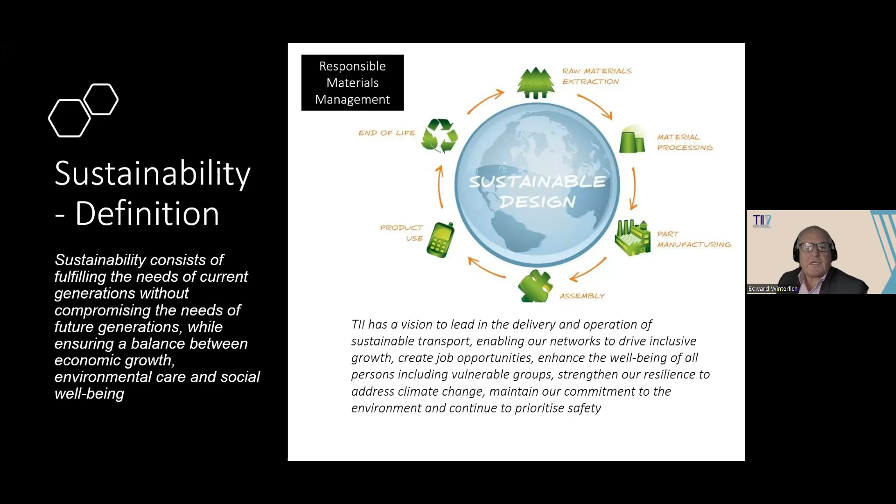So really our vision, as stated in the previous slide, is backed up by a sustainability statement. When you look at the statement, it covers four headings: corporate leadership, stakeholder and public engagement, evaluation and continual improvement, and strategic management.

It's within this strategic management area that I'd like to focus, taking a very narrow focus in terms of standards, pavement and minor schemes. If you look at what's actually printed in our statement under strategic management, you can highlight very quickly in those paragraphs where the importance is providing guidance and standards for industry.

And that's what TII do. It's setting the scene and providing the tools so that industry can respond, maximize and optimize their designs within the IAPDM, and also maximize the amount of materials that can be recycled and reused in a sustainable way, and be innovative in producing new materials.

That runs right across, and it's really down to them to achieve efficiency gains in the operation and running of network systems. So it's taking all of that, not just one thing. It starts with effective asset management, and runs into proper and good quality production of materials.

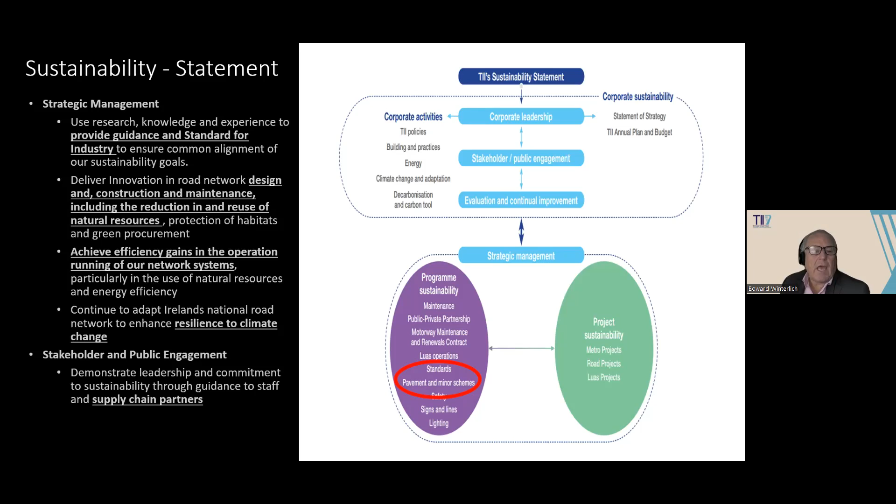So again, when you look at the vision and the statement, that's backed up by our sustainability implementation plan, which covers 6 principles.

Within the context of this presentation, I'm going to focus on principle 4 and 5, which is to deliver end-to-end improvements and this transition to net zero. It's delivering enhanced whole life cycle costing and value through the impact and influence on stakeholders and partners and suppliers.

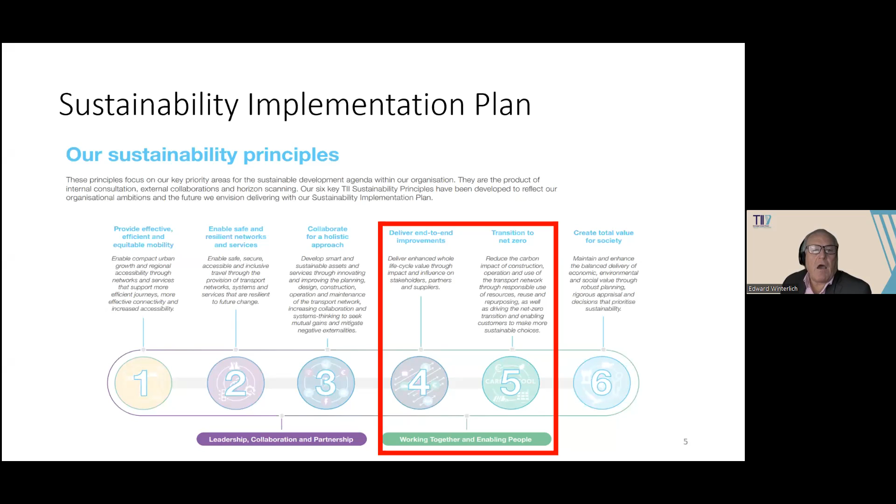The transition to net zero - well, pretty much 5% of the embodied carbon in our network is really down to materials only. The rest is to do with traffic volumes and emissions from transport. But it's taking that small piece and doing what we can, by producing proper materials and implementing and managing them in a proper asset management way, that we can work towards reducing the emissions of transport overall. So that's where I really want to focus this evening.

Principle 4 really talks about delivering enhanced whole life cycle value through impact and influence on stakeholders, partners, and suppliers by using fewer resources, using procurement to build total value, and providing guidance to suppliers via standards, working with suppliers and stakeholders to find solutions, and influencing the use of sustainable materials and better design.

Pretty much all of that is what we're currently doing today. The only bit where there is still significant work to do is in the second point, in terms of procurement and bringing all these systems together in some kind of sustainable procurement manner. Again, it's responsible materials management right through from the design of the pavement structure, to incorporating the various products in that structure, and then procuring them in a sustainable way.

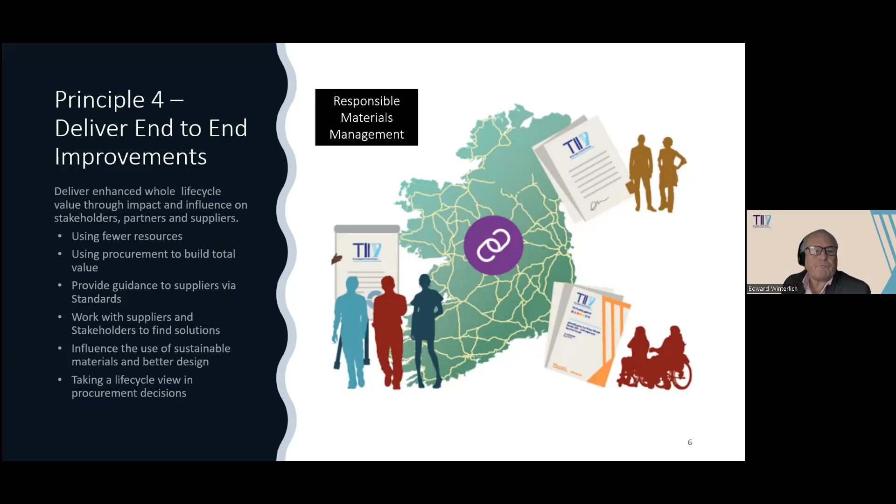The principles of transition to net zero, again, by decarbonizing our own activities. So within that 5%, it's doing what we can to reduce the carbon within the production of these materials, and re-engineering our systems to optimize material use. That's the definition of our Irish Analytical Pavement Design Method, contained within our standard DN PAV 03021. It's trying to reduce the amount of material we use, and through better maintenance, increase the lifetime of our assets. So it's about optimizing our design and maximizing our recycling capacity within the industry.

So how are we managing our pavement sustainability today from a pavement asset management perspective? On a daily basis, we're looking at this in TII, and our policy is set out there: assets will be managed in a sustainable manner through the development, implementation, and maintenance of an asset management approach that is risk-based and data-driven. And that's the entire nub of it - it's risk-based and it's data-driven.

It's evidence-based, so that we can respond to issues on the network in a sustainable way. Good asset management requires coordinated and optimized planning throughout its life cycle, from development, creation, maintenance, and ultimately disposal - that's contained within that graphic there. So it's following that right from the very start in designing your asset management system.

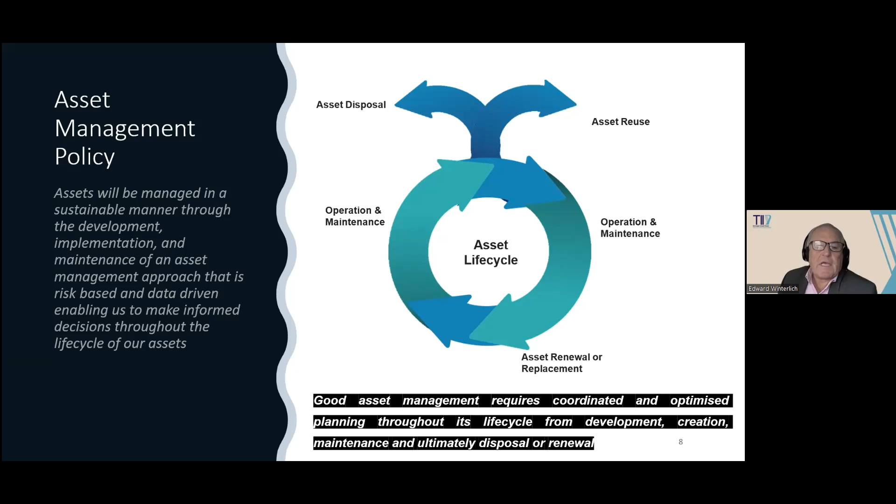Our system is designed in such a way that the key was setting it up to define the network in terms of its sub-networks. So we treat our motorways differently than we treat our legacy pavements at subnet 4 and our low volume, really low volume national secondary coastal routes, for instance.

That's defined - I'm not going to read all of that, but within the presentation it gives you what a motorway and a dual carriageway is, which is fairly obvious. In terms of an engineered pavement, these are the national primary routes that may have been previously realigned, and if they've been realigned, we assume they'd have some kind of engineered pavement. Urban networks are fairly obvious, and legacy network 3 and 4 are the sub-networks and the low volume roads. So you can't treat a motorway in the same way as you would treat subnet 4.

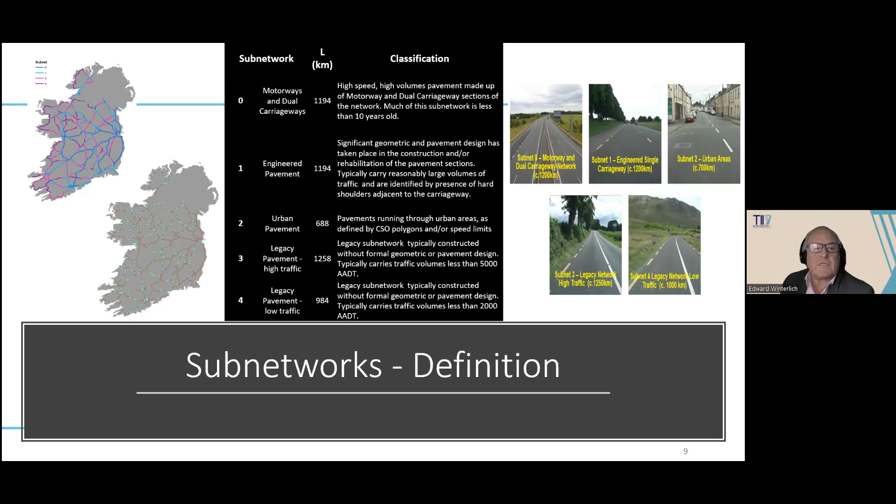That was key to our asset management policy, and in further building the resilience of our network to climate change. How is that done? Well, very simple - we have different levels of expectation from each subnetwork.

It's built around the criteria of IRI, rut depth, and longitudinal profile variance at 3 meters. So within subnet 0, our motorway network, when it's operating in the very good category, we expect an IRI of less than 1.5, whereas down at subnet 4, we're happy enough if it's operating less than 3. So that gives you an example right across the board in terms of how we expect our network to perform.

By analyzing the network in this way, we can have a very targeted approach to what treatment is required, and we can sustainably build a program of works - the current program is from 2022 to 2024, over a 3-year period. We can then rerun the system on an annual basis, refine that program if necessary, and pick up any areas that may have failed or deteriorated quicker than we would have expected.

And within the system, we have treatment costs and benefits and different outcomes from different maintenance treatments. That's hugely important. We're getting the whole sustainable approach to the management of our network in the first instance, before we even get near developing the various designs or interventions we possibly need to do.

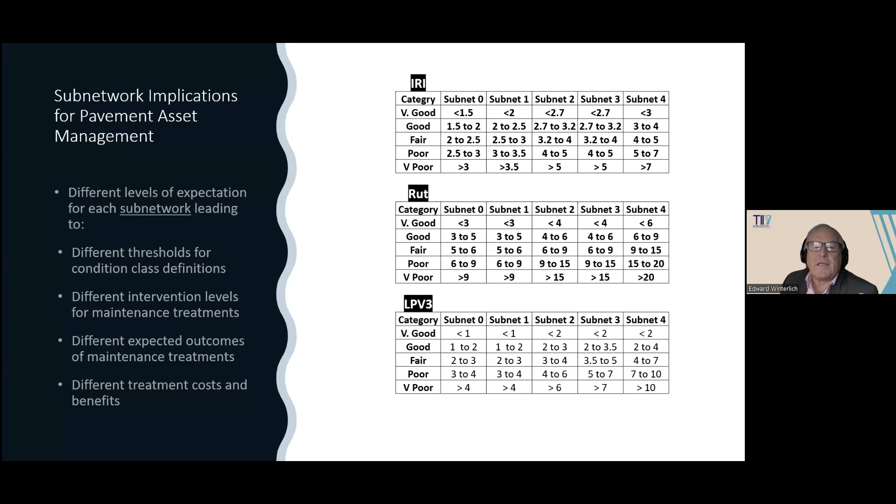And then within the system, we have interventions defined as being surface replacement, an overlay, or strengthening or reconstruction. So as I say, that's hugely important in setting the scene and setting our response to managing the network in a proper and sustainable way.

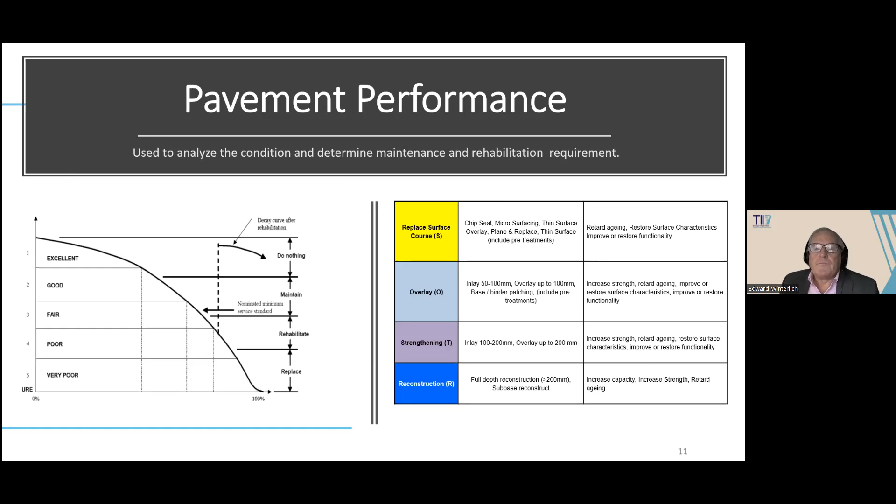The next part of developing this sustainable response to managing the network was to look at our materials. You'll note our Series 900 was published in 2022, and that was a direct move away from the old British standard recipe approach, where all materials were treated the same, to a more performance-related basis, whereby we set out that we wanted materials to operate in a certain area in terms of voids, proportional rut depth, and in terms of water sensitivity and stiffness. So that was a move towards European methodologies as opposed to British standard.

This was setting the scene essentially to bring in a sustainable design method and treat materials differently. Equally, Series 800 has been published recently, I think maybe July or August, and again that was a move away from the whole British standard methodology. Now Clause 804 is known as Unbound Granular Material A, and in terms of its performance, it's a move away from a recipe-type specification to a more performance-related one. Depending on the design level you pick within the IAPDM, you can figure out what your design performance is, whether it's compaction or other stiffness methodologies, stiffness modulus, and so on.

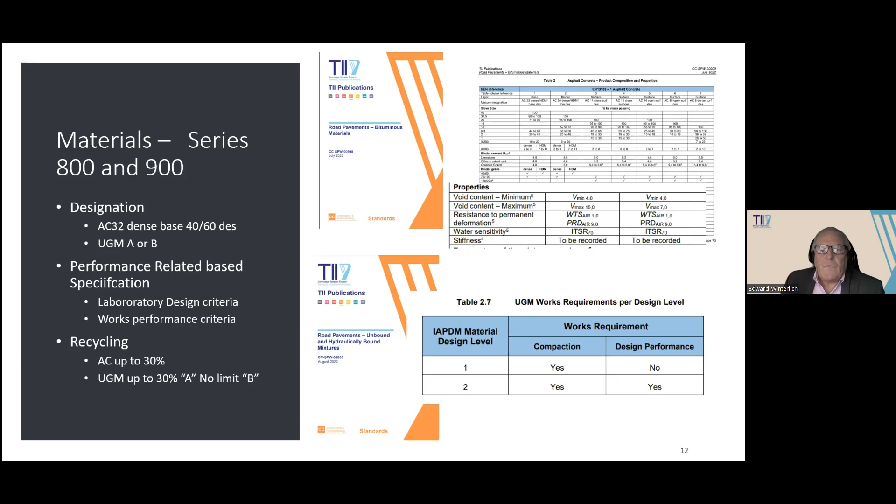So again, how are we managing our materials, our pavement design, as of today? What are people doing? They're actively engaged in sustainable design, given that we published our IAPDM last month and its associated standard. What we moved was away from a recipe approach, an empirical approach, to a mechanistic empirical design. So we're looking at our models, taking into consideration the climate, importantly the material properties - again going back to Series 900, taking into that performance-related properties - taking into consideration traffic. It all goes into this mechanistic analysis, and then outcomes to predicted performance.

This is the critical piece of design software or standard that is required, in that now we can take industry's innovation, or the various RAP contents or recycled aggregate contents that we want to use within mixes, and directly compare their performance to a standardized mix. That is a game changer in terms of sustainability.

That was published and is available, and I think I've currently got about 30 people signed up across our web portal with access to use that design approach. The other old method, HD 25/26, is now withdrawn, and this is the standardized method of design from here on out. So this is all happening on a daily basis now, which demonstrates that the bituminous industry is behaving in as sustainable a way as possible based on current standards.

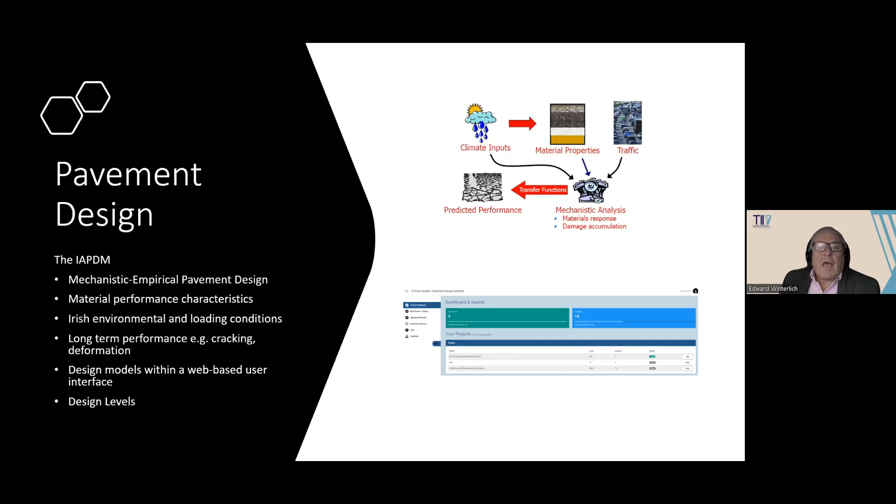Again, the other critical piece not quite delivered yet is the whole life cycle management tool that will go hand in hand with our IAPDM. What we're looking at is developing environmental product declarations, which are key to this whole environmental and sustainable piece, in that you will be able to use the IAPDM to come up with various design options - design option 1, 2, and so on. Then it's taking the EPD and life cycle analysis, initially for a product and then subsequently a project, and putting that into a life cycle management tool that's linked with our IAPDM, and then producing an optimal design.

That's the main piece of work going on currently, and we have delivered to our industry working group, in a spirit of detailed collaboration, the first draft of our product category rules, complementary product category rules in accordance with 15804, for the product stage from A1 to A3. We hope to expand that into the construction stage and then on into C and D. The very difficult part is the user stage, and that will be coming on later, it's really a matter of availability of data.

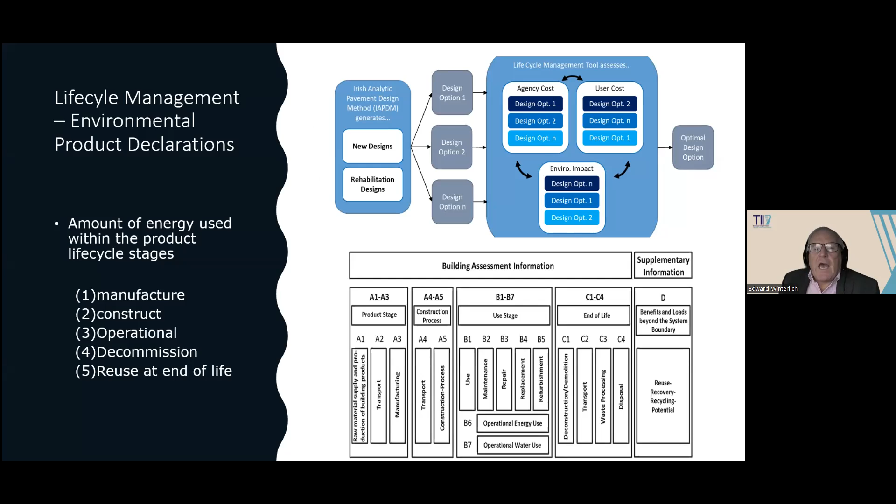So that's an ongoing piece of work, and an update is that the closing date for comments from industry was last Friday. They've been very good to respond. We'll analyze those comments and adjust the documents if necessary, or certainly clarify and explain. It would be my hope to have contained within our Series 900 a requirement for industry to produce an environmental product declaration, similar to a CE mark, as part of the product specification, and then ultimately working that through to project and into the procurement piece, which is probably a bit further down the line.

In terms of education, Engineers Ireland run a course which was developed by TII in association with our technical partners, Arup. This is the education piece - it runs from Engineers Ireland and is accredited by TU Dublin at 5 ECTS, essentially one module of a master's. At the very core of this is IAPDM and lifecycle management, and really this course is everything you wanted to know about pavements but were afraid to ask, to take a phrase from a well-known movie.

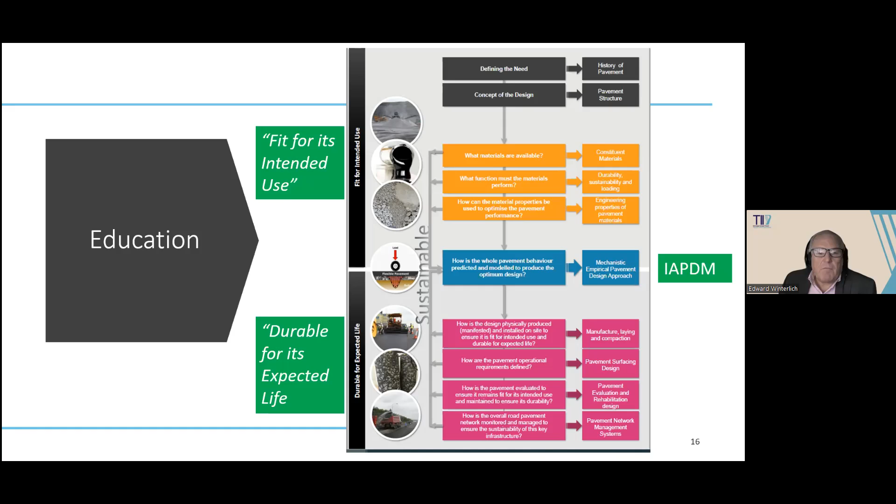Thanks very much. So my name is Alan Anderson, I'm a project engineer with Colas Ireland. Today I'm going to talk you through some of the materials we use in pavements. I'm going to talk about some of the low carbon options.

So again, I'm from Colas. For any of you that don't know, Colas is an abbreviation of cold asphalt. So that's some of the topics I'm going to talk about.

So what I'm going to do is go through some of the processes that are being used on TII on the network, and then some of the other processes and maintenance tools that can be used. I'm going to talk a little bit more about the materials, the basics, and hopefully you all get something out of it.

All of this aggregate that goes into a hot mix asphalt, in the name, has to be heated up to 180 to 190 degrees. The bitumen is at 160 degrees. So it's mixed together through the plant, depending on what type of material you're looking for - our asphalt concretes, our hot rolled asphalts, and our SMAs. They're brought to the site and laid at a higher temperature.

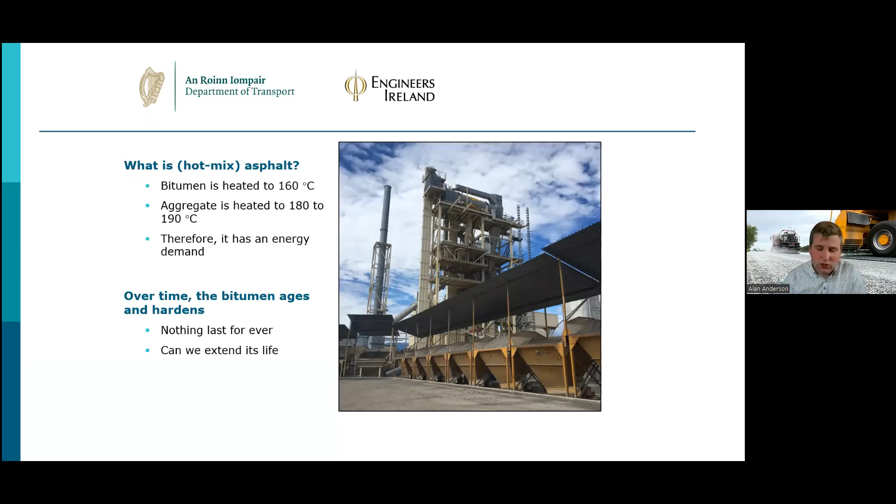So again, that's just brought to site, laid hot by a paver, and then compacted to get your required densities with rollers. Some of the alternatives work in conjunction with a hot mix. We have two options, I suppose. One is a warm mix asphalt.

So again, this is the same typical process - you're doing your hot mix asphalts and adding either a wax, foam bitumen, or a chemical surfactant to reduce the temperatures of that hot mix. As can be seen on screen, it can be reduced by up to 35 degrees for mixing and laying temperatures.

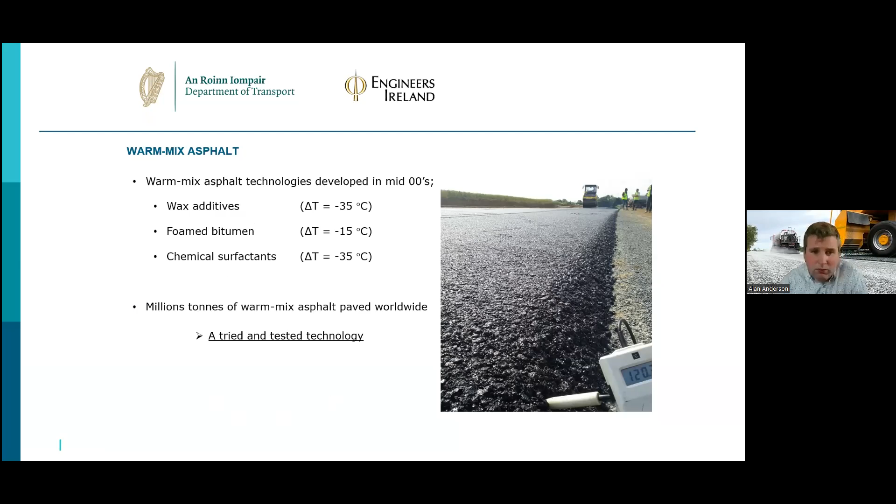Here's some information on warm mix that we've done within Colas. As I said, we can reduce it by 35 degrees. It does reduce the VOCs on site. It can reduce the mixing by 15 to 20% in fuel usage. And we can have a saving of 16 tons of CO2 equivalent, per kilometer, when compared to 22 centimeters of asphalt layer, 7 meters wide of a pavement.

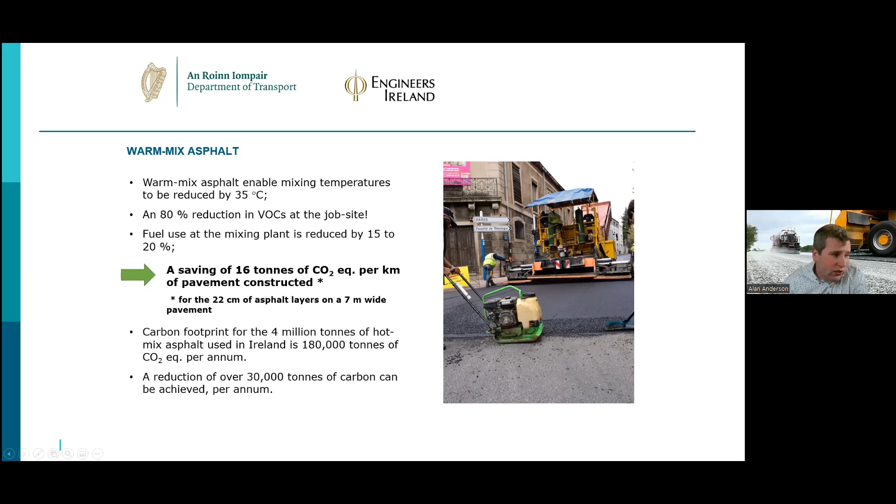So where am I getting these figures? This SEVE tool is an environmental tool designed by the European Commission. It's used in France, Hungary, Spain, Germany, and us as Colas - we have access to it. It's an environmental tool, so it gets your raw materials, your manufacturing practices, your transport, puts it into the tool, and gives you your outcomes of your environmental impact - the greenhouse gas emissions or your carbon footprint. That's a tool that's used across Europe at the minute, and for this presentation purposes, I have put in some figures.

So what that tool does is give contractors or the people doing the work an option to use an environmental comparison between different processes, some of which I'm going to talk about now. It can show you the benefits of using a particular process on a project.

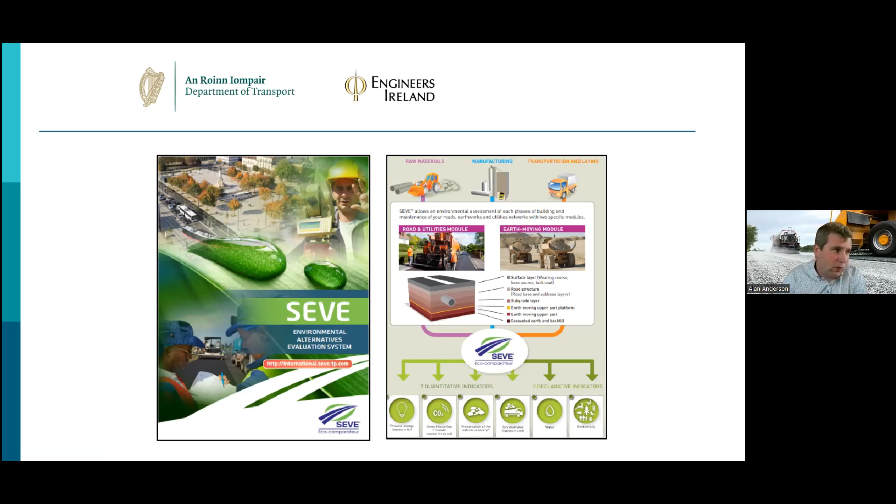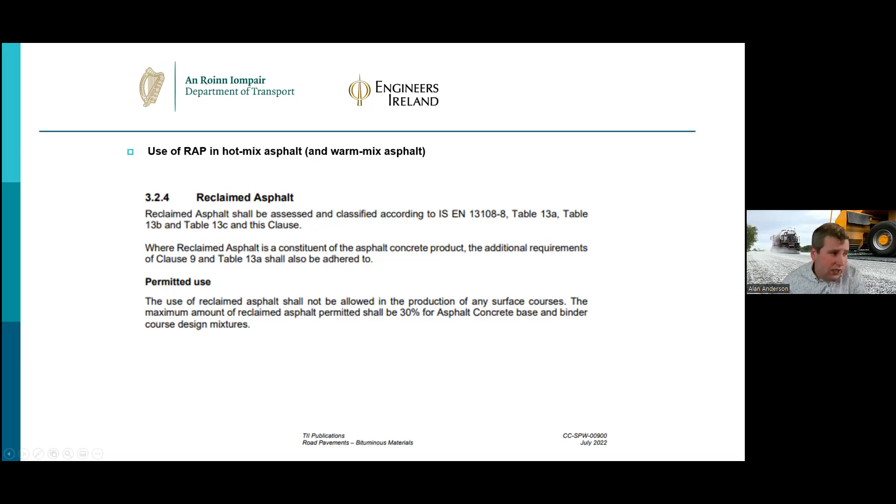The second part, when I'm talking about hot mixes, is the use of reclaimed asphalt, which Eddie showed in his slide. The most important point is the last sentence: reclaimed asphalt should not be used in surface courses, but you can use up to 30% reclaimed asphalt in your hot mixes for base and binder courses. Just something to stick with there.

So what are we talking about? Reclaimed asphalt - asphalt that's already on the road. It's planed up and brought to a storage facility, like the one on site here. In the hot mix industry, you have to keep the asphalt under cover to keep moisture out of it for when you're putting it into your hot mix. And as I said, 30% can be used.

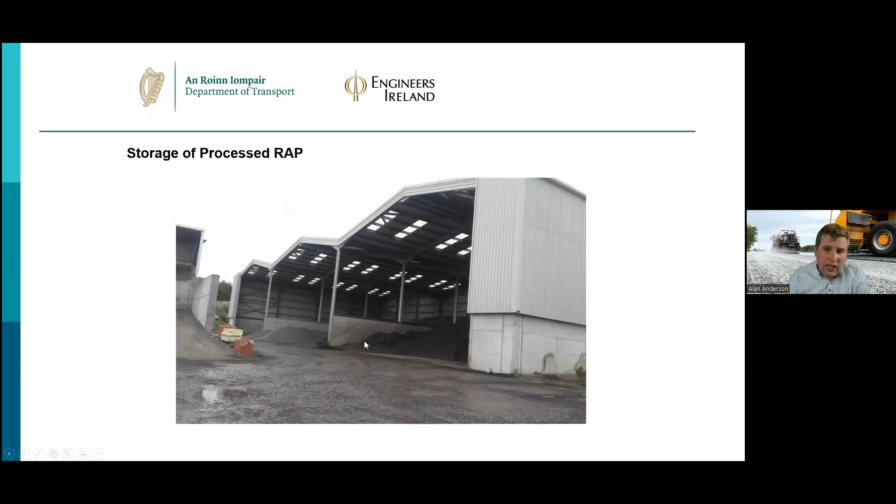I have a slide here from the Irish Asphalt Pavement Producers Association, IAPA, thanks to Edmund Hegarty, who's actually on the call tonight. There are 42 asphalt plants around Ireland, and 17 of them have the facility to reuse reclaimed asphalt. So for anyone on the call who might not be aware, this is what the industry is doing for asphalt. They're spread around the Republic of Ireland and are able to use reclaimed asphalt in the process, up to 30%.

There's actually a project that Eddie is involved with, the TII are involved with, where they're doing trials using up to 60% reclaimed asphalt in the product. It's something I don't know an awful lot about, but I said I'd mention it.

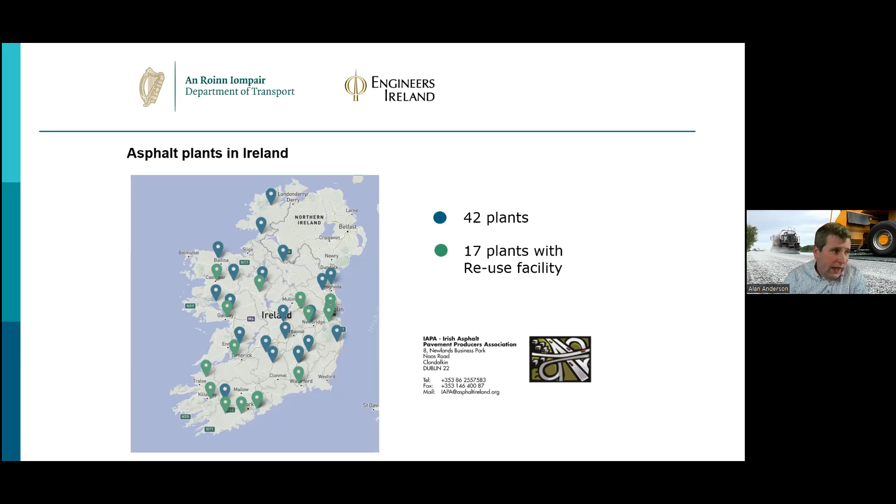So then, what I'd be based in is cold mix asphalt. What's the difference compared to hot mix asphalt? The main difference is we're not heating the aggregates and we're not using a hot bitumen binder. We're using a bitumen emulsion, typically between 30 and 80 degrees. Similar setup - you use different fractions of aggregate, mix it with emulsion in a mixer bin, and then convey it onto site. It's a cold process.

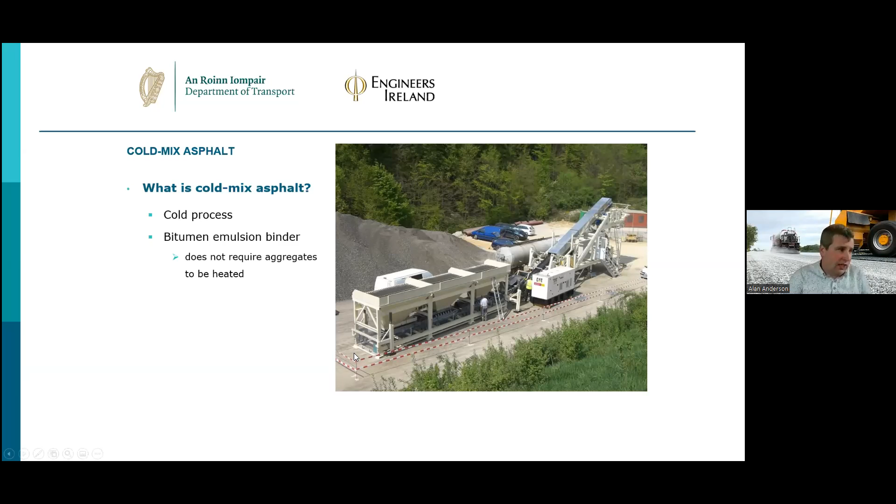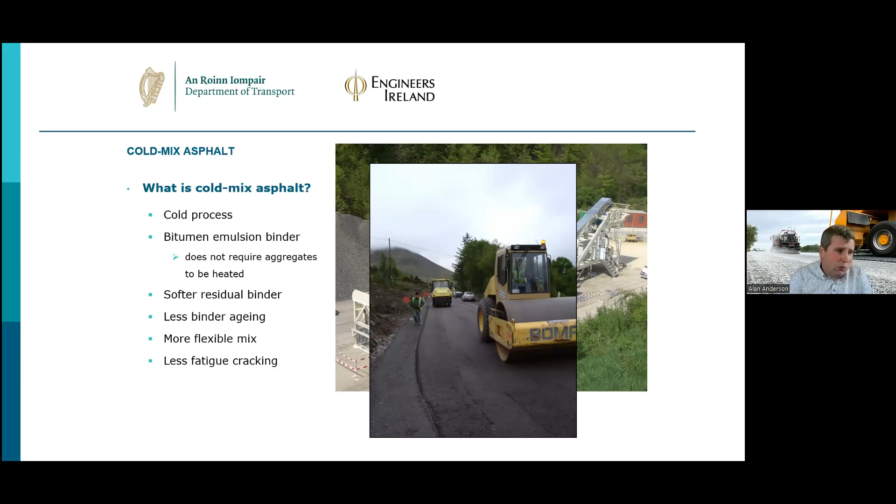This is what it looks like on the road. Your base and binder layers can be used for this. The advantages are a softer residual binder, so you have less binder aging, a more flexible pavement, and less fatigue cracking in its lifetime.

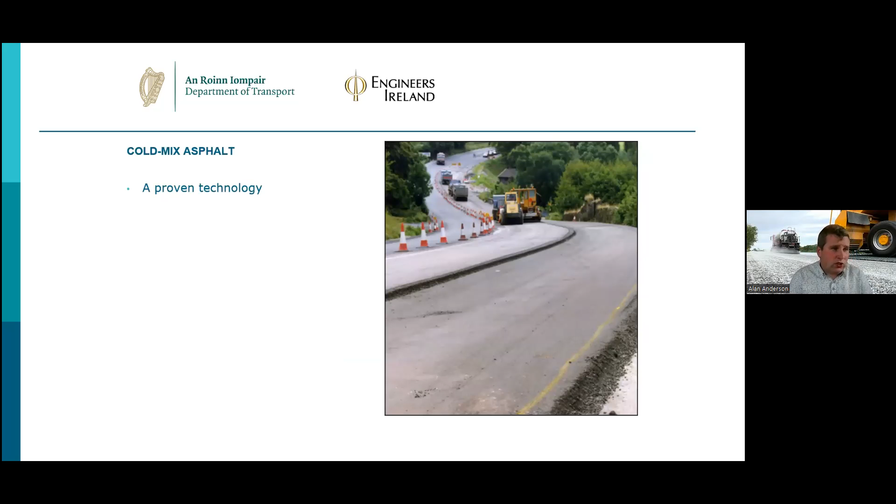Most of these products I'm talking about are tried and tested. This site was on the M8 down in Fermoy. The job was constructed in 1989. As you can see, that's a picture of the site there, and we used 20% of a corrective aggregate.

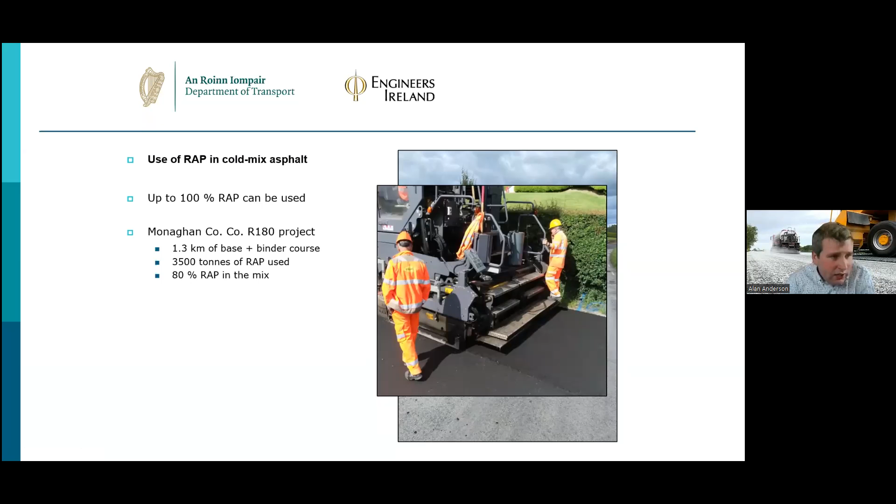I'll show you the laying of that contract. This was done in association with the Department of Transport, the TII, and Monaghan County Council. The process was laid in two layers - this was the base and binder of the road, and then we surface dressed the road afterwards, so it does need a surface dressing.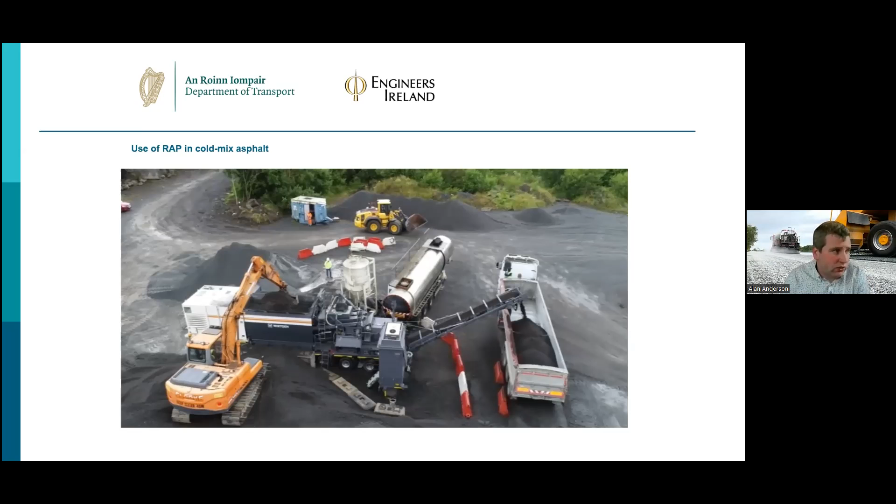I'd like to mention my colleagues Alan Kavanagh and Kevin West from Monaghan County Council, who are doing a specific talk on this project with IAT tomorrow in Enfield - if anyone is available to go down to that, it will be a good talk. So that's it on the use of cold mix with recycled asphalt.

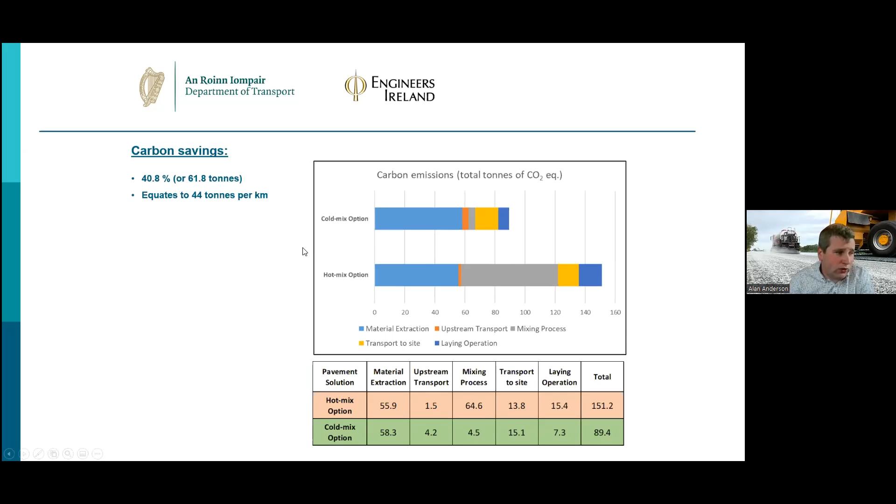Again, we did a specific one using the SEVE tool for this project. The project was designed by Arup, so we had a hot mix option and a cold mix option for this exact site, and we found 40.8% savings in our carbon, which equated to 44 tons of carbon saved - quite significant for that project.

And I'm going to go back onto in situ site recycling. As Eddie said, we're not always talking about motorways and dual carriageways, we're talking about the low volume traffic roads. This is just another option for engineers when you're doing your pavements. This is what we call our in situ recycling - I suppose the terminology mightn't be correct, it's more of a reuse. We are reusing the material into the pavement, and it is in situ, so it's not leaving the site to be mixed like the other two processes I was talking about. So again, it's an engineered pavement.

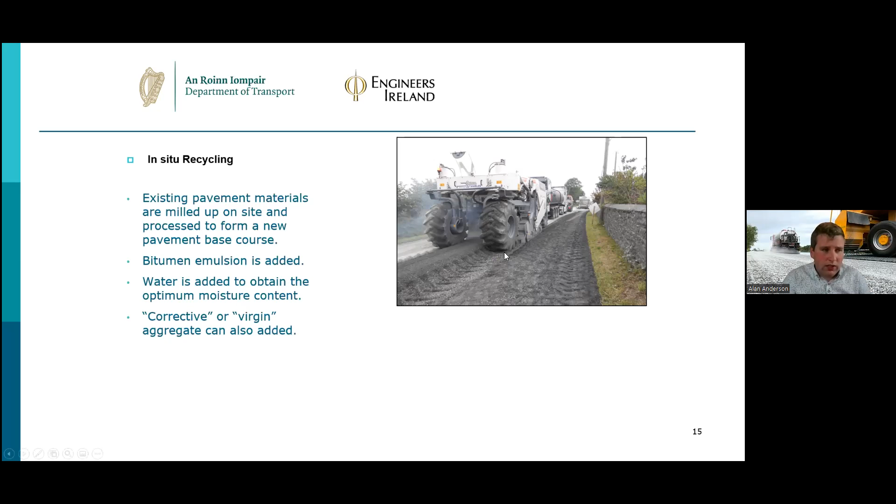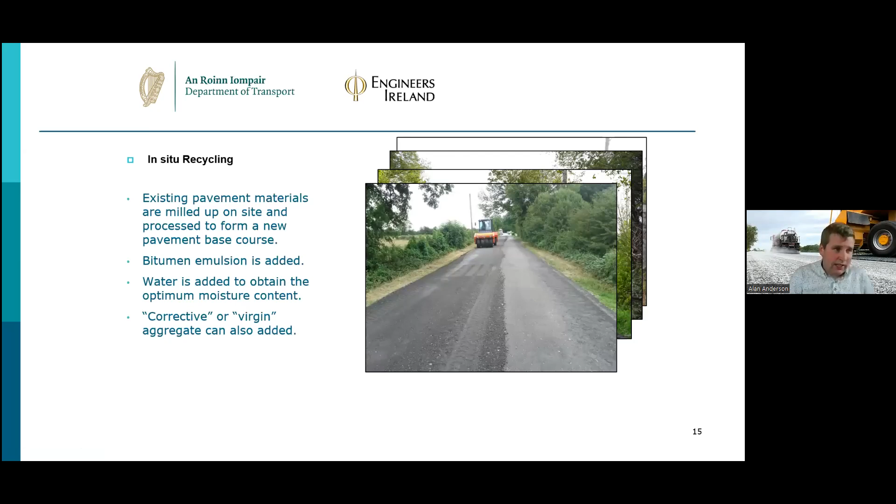We're adding our bitumen emulsion, and we're adding water again to get your moisture content. When we are designing an in-situ recycling, we might need corrective aggregates or we might need cement. This can be spread on the road in front of the train, and it's mixed up all together with the emulsion. Then we have a grader that grades out and gives you a profile of the road, and then we compact it again with steel drum and rubber tire roller. That's followed up by a surface dress, something similar to the cold mix I mentioned. So again, another option there for recycling.

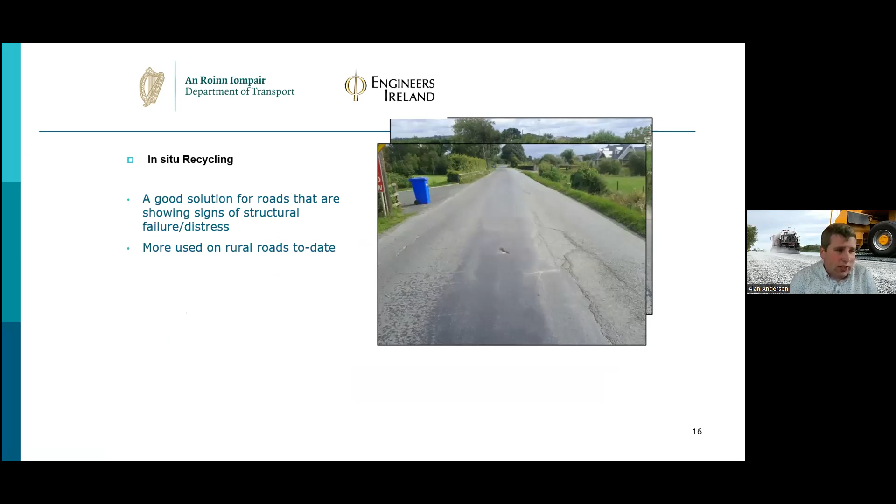So where is this suitable? I suppose if you have structural failures or distress, as you see something like this on the road here - we have cracking, a very variable road, a lot of potholes, the surface is gone, some edge deformation. There you see some structural damage again. So what we do is bring in the machine - it has a drum on it that planes the road effectively. It adds the bitumen emulsion to the water, and it's laid on the road afterwards.

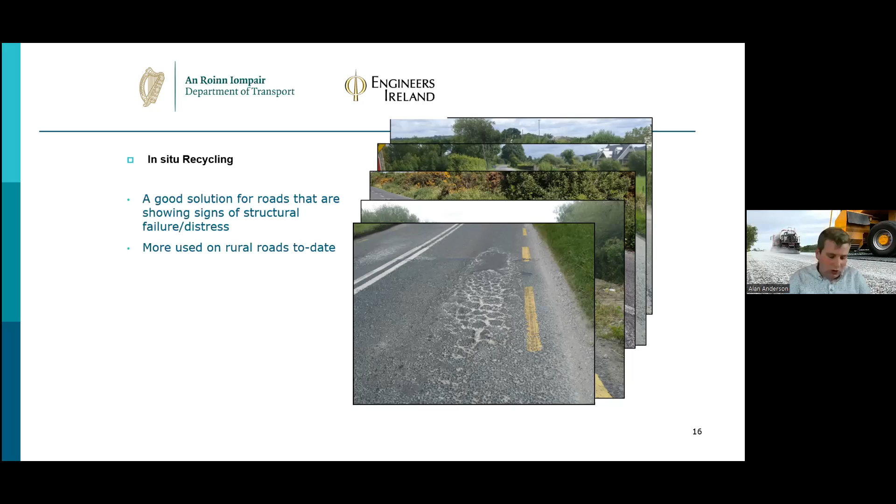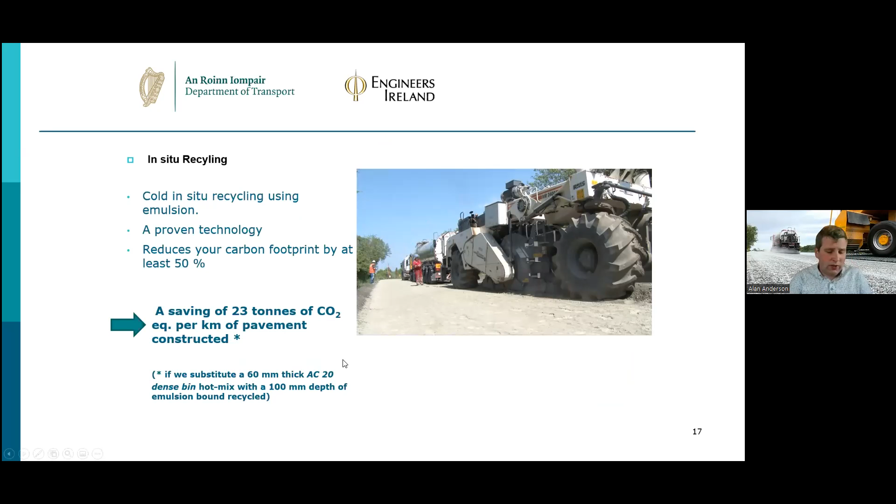So that's the train again with the emulsion tanker and the water. This is widely used on more local and secondary roads throughout Ireland. A tried and tested material, it reduces your carbon footprint by at least 50%. And again, you can see some of the savings when you compare it with alternative methods of bringing new material to the site.

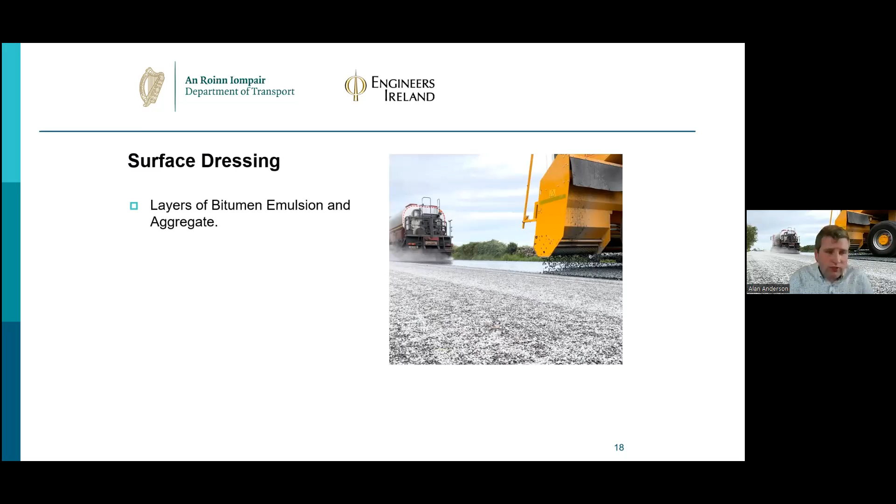Another one for the same type of roads - local and regional roads - is surface dressing. So what is surface dressing? It's thin layers of bitumen emulsion followed by aggregate. It increases the skid resistance of the road. It seals the road from moisture getting in and causing potholes and degradation of your underground layers. It's a cost-effective, durable surface, and it can save you up to 53% when compared to a 50 mil thick overlay.

So again, another process that's widely used across the island of Ireland, but it might not come to everyone's mind that it is a carbon saving product when you compare it to alternative methods.

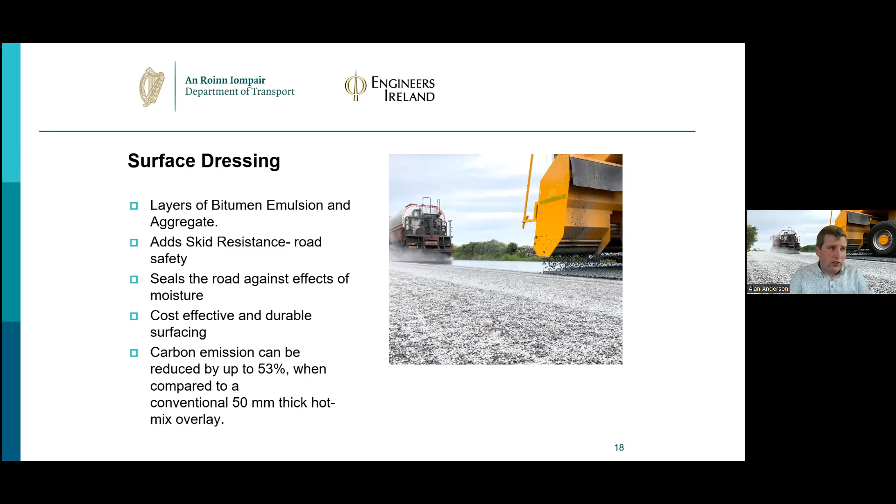I suppose some other options that Eddie mentioned are materials and material management. We have a very good source of aggregate in Ireland - we're using high PSV, bigger sizes of aggregate. It's something maybe to think about, using smaller sizes of aggregate on access tracks and lower volume traffic roads. So again, there are areas where we can be more environmentally friendly and cost effective.

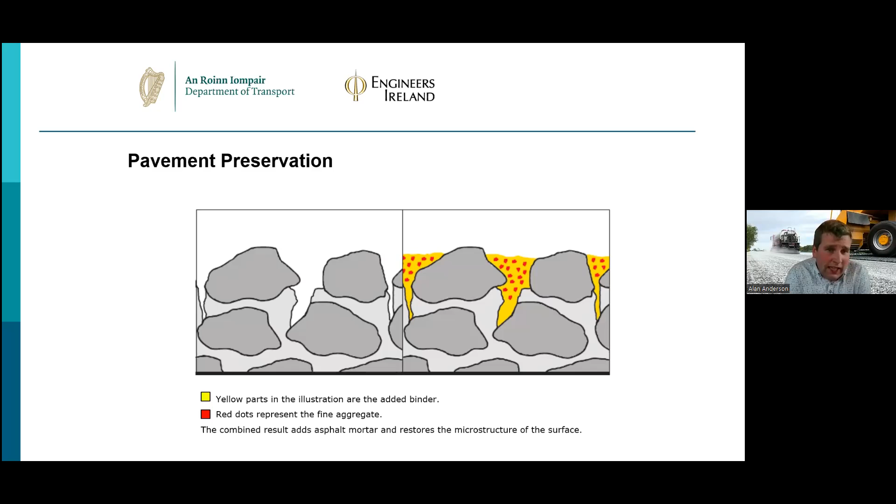I'm just going to go back to a pavement preservation technique here - this would be for our hot mixes. It applies a protective layer to the surface of asphalt and prolongs its life. This product is really a bitumen binder sprayed on top of your HRAs or your SMAs. Again, it has a rejuvenating oil in there, and it brings a softening point back to the binder, and it can extend the pavement life for up to 6 years.

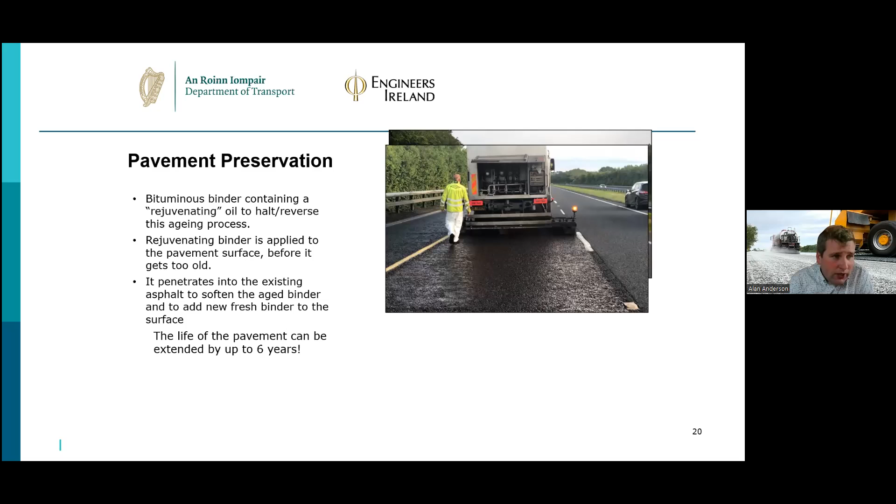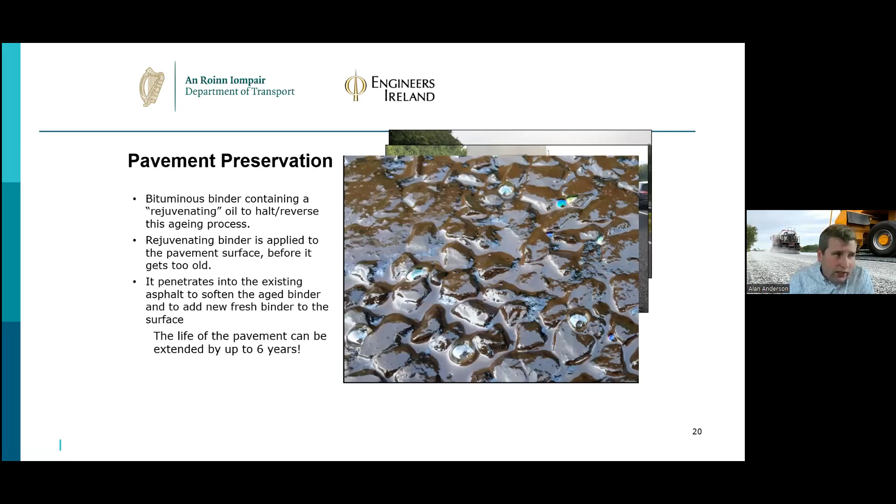So just to talk you through the process again, it's a binder that's sprayed on as a thin layer on the surface of the asphalt - this is really the best picture I have on it. As you can see there, the binder is penetrating down, you can see the air bubbles coming back up. So it is penetrating down into the layer of that hot rolled asphalt and coating the aggregates. We have a high PSV dust that's applied there again, it gives it back the mortar - that's what you're looking for, your mastic back in your hot rolled asphalt. And then after the traffic, you can see it's back in black.

So again, that process - we do a lot of it on the M1. On that project, they were noticing that they had a lot of the bigger chips coming out of their hot rolled asphalt, and it was accumulating on the hard shoulder.

They used to weigh the sweeper to see how much was coming off it. After this process was done, we reweighed it, and they noticed that they were having very little plucking of the bigger aggregate. So again, a good option there is pavement preservation techniques, and they are specified in some of the TII documents there.

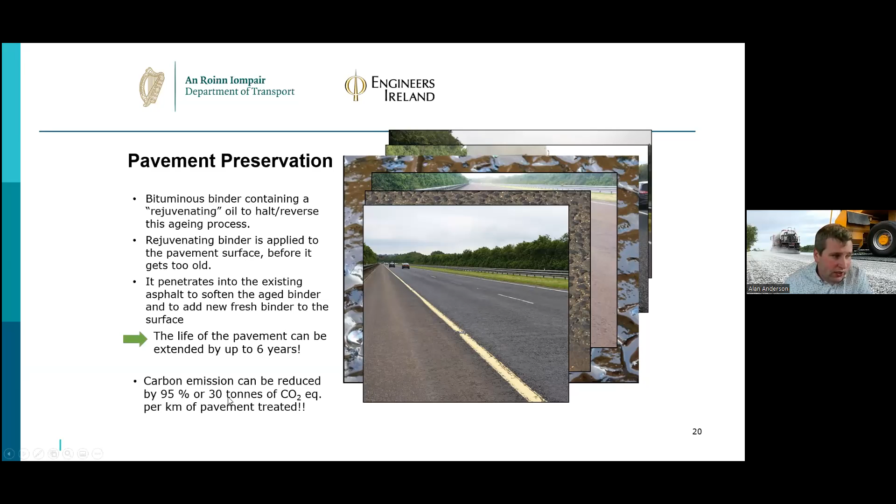And there is, as Eddie said, a place to use innovative techniques and different products to maintain your network. So again, it can be a 95% saving in carbon when you compare it to an overlay.

On the flip side then again is retexturing. Maybe what Eddie was talking about, we have brought up the standards of our pavement. The TII have good documents there, and a lot of the contractors have really increased their products and what they're given to the market.

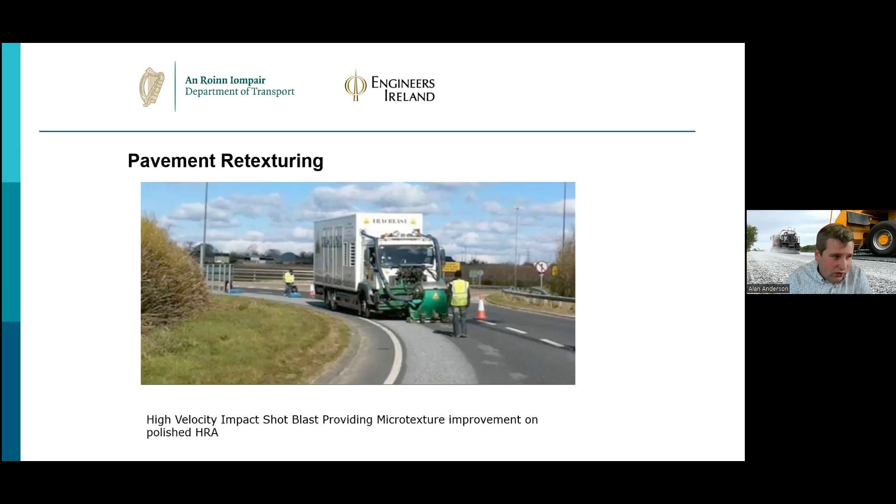This is an option. Again, where we see a lot of this is maybe on our surface dressed roads, where the material is in the road, the binder's in the road, the aggregate is in the road, but we do get this with the increased temperatures. We are seeing the roads boiling up, or fattening up as we call it here, and losing their texture.

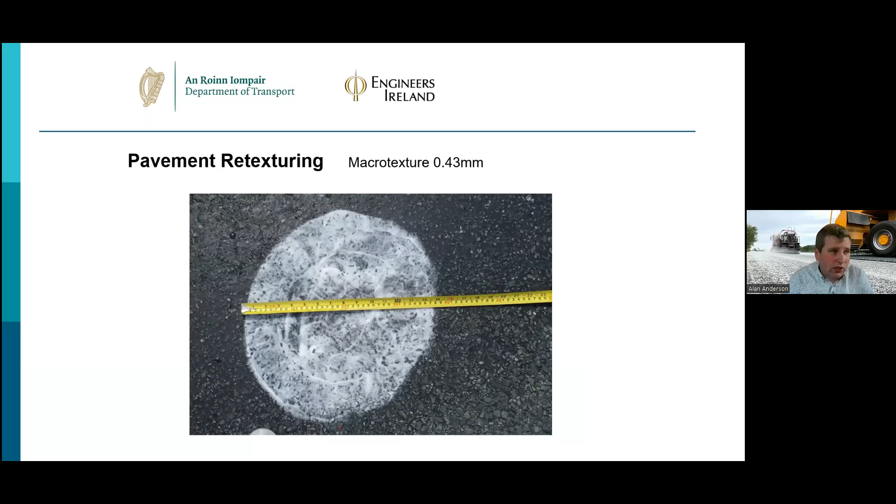So as you see there, this project was a low texture, 0.43. We did a water jetting system, which was the exact same location again, so you can see the texture was renewed there, and we got it back to 1.86 millimeters of texture on that road. Again, another option, as I say, we're talking about saving carbon, not overusing materials, bringing them to the site again. This can be an option in certain cases.

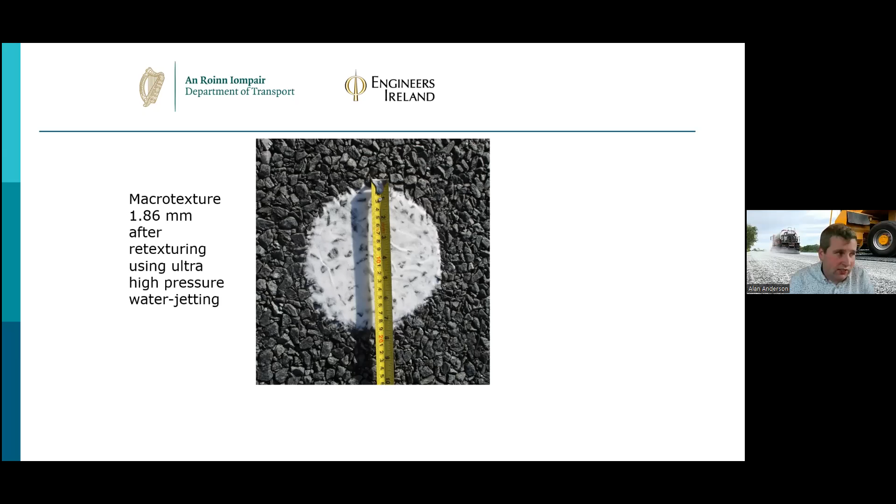And as I say, we want to keep the water out of the pavement if we can at all. This is just, as I say, probably poor practice on joints. Again, with the new 900 series, we have brought up the standard of joints and painting the joints, and making sure we're keeping the water out of there.

But in areas where you do get joints like this, another option is to mill it out and pave it again. As you see here, the joints don't look that big, but when you get the water in there, freeze-thaw action breaks out your pavement. So again, here is an option, and the AM-PAV-06059 is a TII document there that specifies crack seals and joint repair.

So there are a number of systems out there. Typically what it is, a bitumen binder, as you see here, fills up the void, the crack, and then there's an overband with a high PSV bauxite material in it to give you your skid resistance. So again, a simple technique, it can be a huge saving in carbon and cost as well, if this material will work in your joints and prolong the life of your pavement.

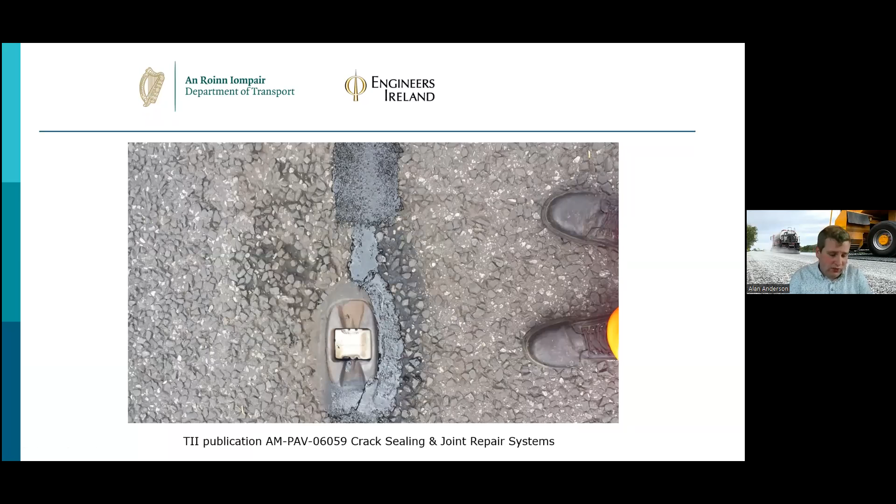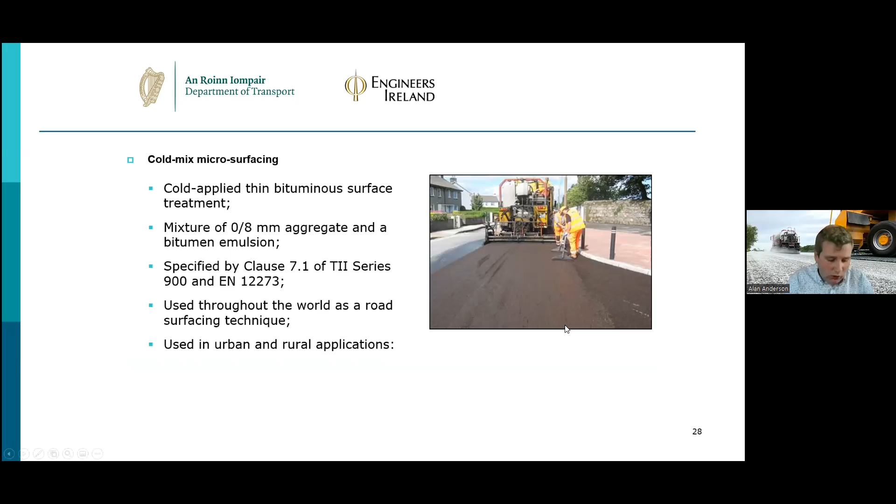Another process here, cold mix microsurfacing. So again, this is a cold mix or a slurry seal. It is specified in clause 7.1 of the TII 900 series again, so it is a product that can be used. What are the advantages of it? So again, it's a cold mix, all mixed on the machine there. It gives thin layers of asphalt, so you don't have to do any work with your curbs or your iron work. So again, it gives a thin layer of asphalt there, with a high PSV in it.

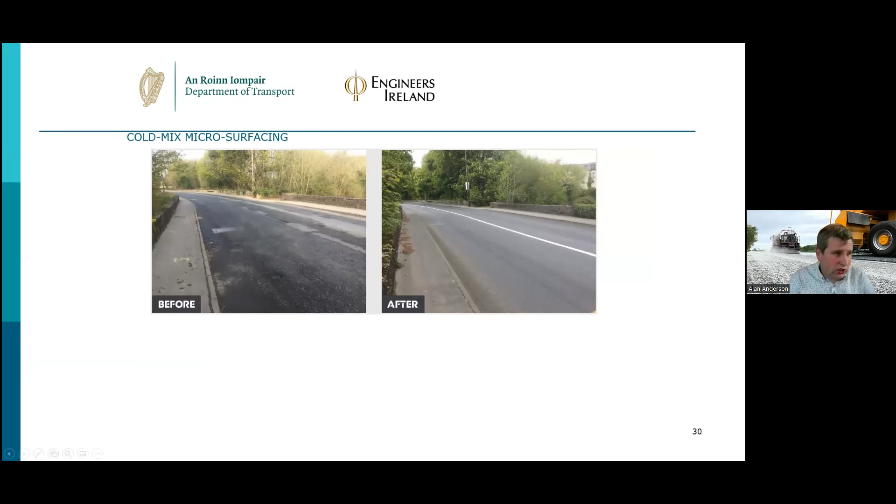Typically what we're looking for is a before here, where we might have trenches or maybe a pothole in our overlay. So again, microsurfacing might be an option there. So just another process where, when we're comparing it with the thin layer asphalts, we can save carbon again. So that's typically the end of my product.

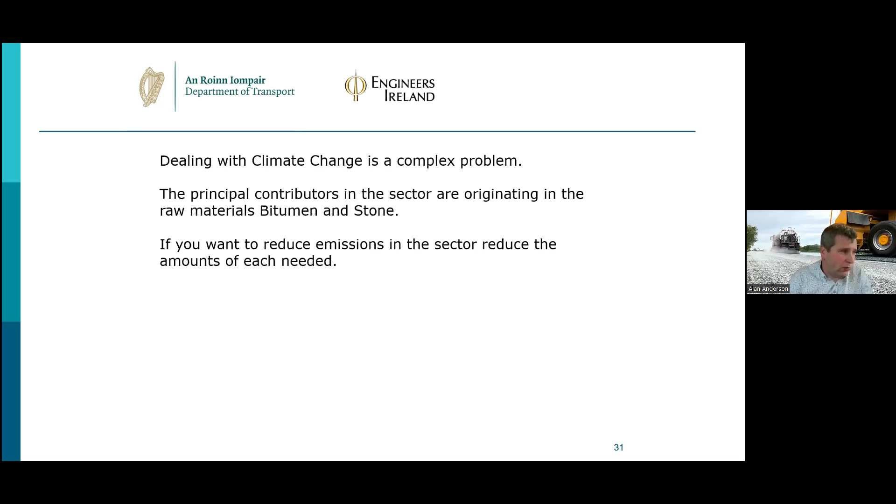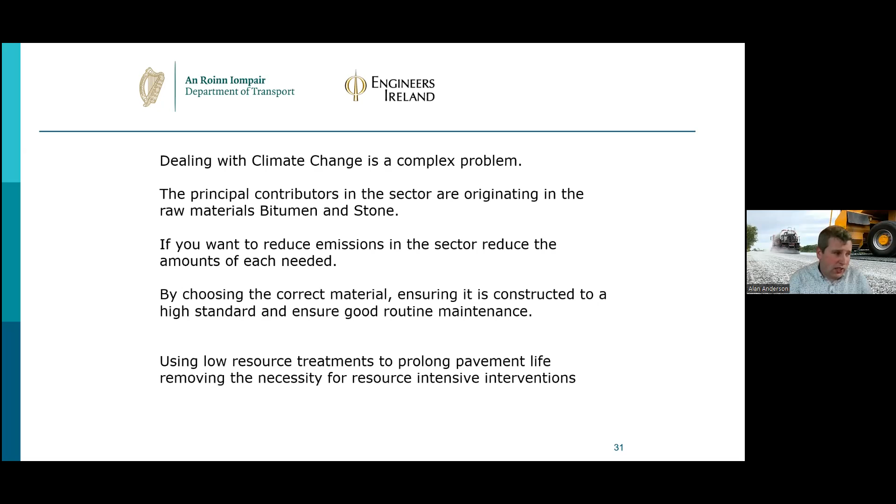Dealing with climate change, I suppose, is a complex problem. The principal contributors, as I said earlier on, are our materials, so the bitumen and the stone. One way to reduce emissions in the sector is to reduce the amount of bitumen and stone we're using, and choosing the correct material, ensuring, as Eddie alluded to, that it's constructed to a high standard, and then ensuring we have a good maintenance routine, as Eddie talked about in the life cycle analysis. Use of low carbon treatments to prolong the pavement lives is also another option, and the use of low energy pavement materials and methods where pavements need renewal and replacement. So again, some things to think about there.

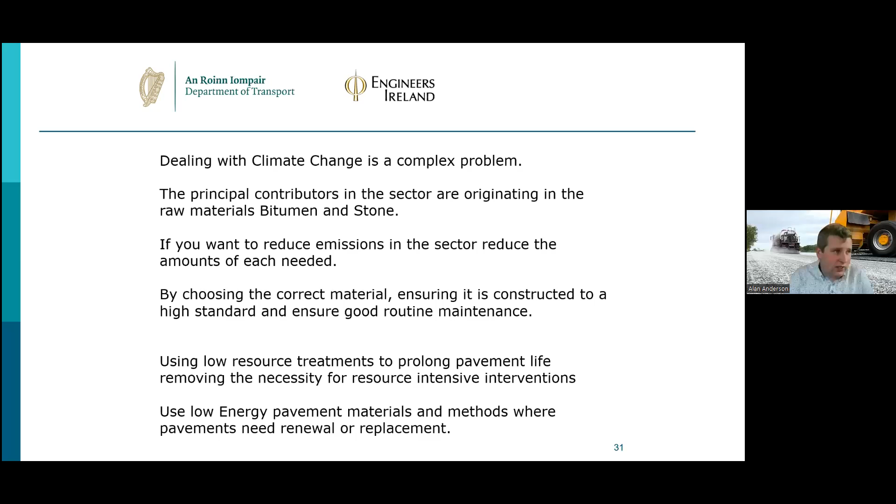Thank you very much for your attention. That's my presentation, and I look forward to any questions.

Thank you. That was great.